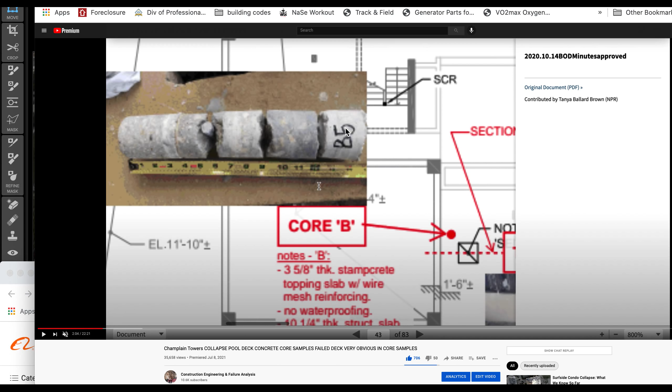Look at this video down here I have called Champlain Towers Collapse, Pool Deck Concrete Core Samples Failed. Deck very obvious in core samples. All right, here are your samples. This is B5, as we go to 8.

Tom, I wanted to give a shout out to you on something here. Let me jump right into the repairs. Look at my notes here also. I got a few pages to hit on.

So let's look at this deck repair. This says pool slab full depth repair. So that deck had some major issues with it. I talked about that in the video, and I don't know if that video or another one, but this shows it was failing in the middle.

Now, I think what happened was, using all the witness statements now, specifically the Nayers, the 111 people - when she heard collapse, when she heard the floor fall down or wall fall down above, and the daughter said the same thing, I think what happened was part of the deck in the garage had an initial drop, and then a stop. And that stage that stopped went all the way over to the building and shook their building.

Now she goes - at that point she doesn't look out the window, she doesn't look out the door, right? She goes to the office. She walks down the hall to complain about noise. And then she hears a loud bang from the garage.

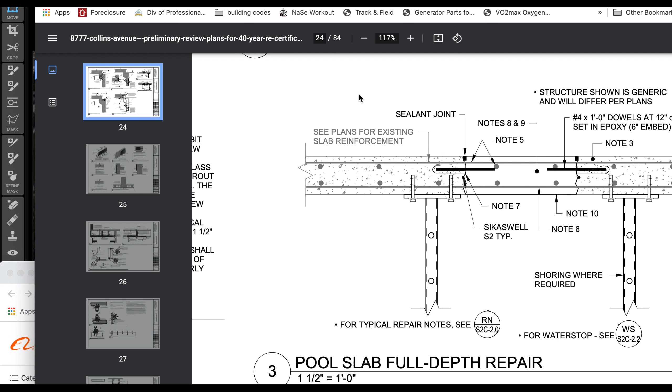Let me do that visually now. So 24 - I should go to page 11. Well, before I do that, I want to show you these are full deck repairs. I want to show you something else that's kind of a ridiculous statement on here. Let me back up - not on my part. I make a lot of those, but not right now.

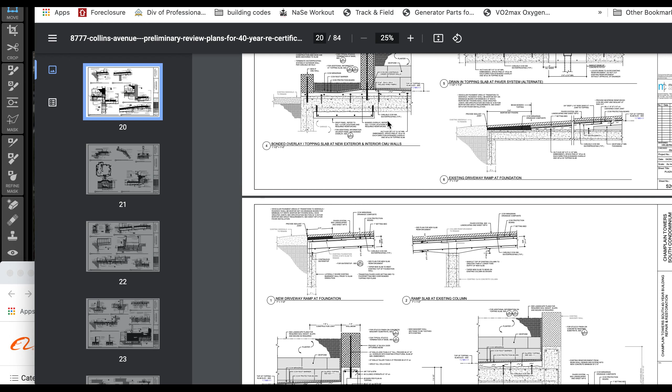So I come up a little bit. Look at my notes here. I think at page 11, but I think there's something up here real close, or it might have been down below. Let me just push on through this to page 11. Then we'll come back to page 2, 3. Yeah, let's push on through this. Trust me on it, and bear with me.

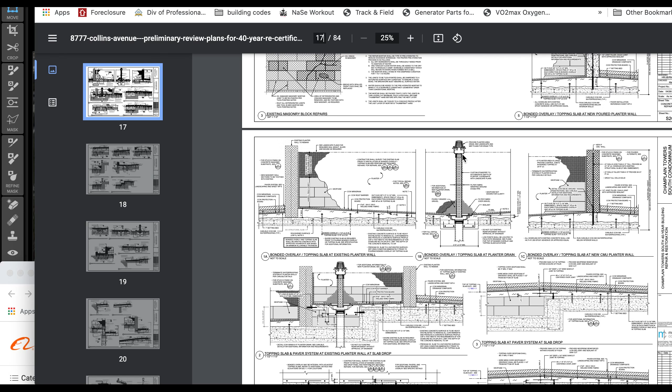So that's a slab drop right there. See, topping slab pavers at storefront at slab drop right there. And slab drop again. And your BMAs - of course we know them, they're beam style A, right? But BMA is the quick way to get to it. Just say BMA, just do the abbreviation. You don't have to say beam A, just BMA. For the triggered people out there, you'll get over it.

All right, so I'm on page 15 now. I want you to think about punching shear protection, about critical shear zones. Well, this is a BMA right here. This is the beam A. This is the BMA right here. And look what they're doing here at a BMA.

This says gravity fed epoxy full-thickness crack. A full-thickness crack - you know what that means? That means this concrete has pulled away in the rebar engagement, as we talk about it in a very light manner. We have some pull-out going on here. To get pull-out, we have to have deflection. We have to have loss of stiffity - stiffity to get pull-out, you got loss of stiffity. Yes, I said stiffity. All right, so this will be the deck.

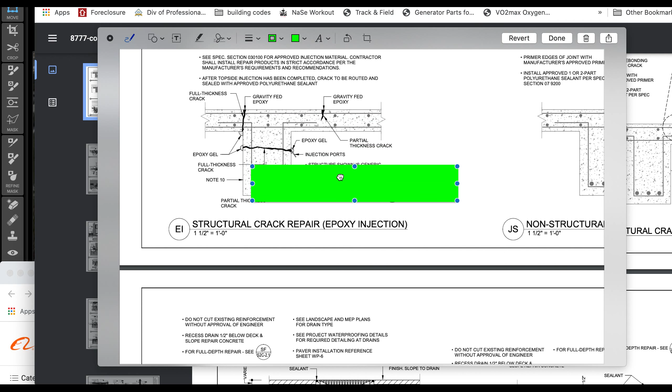And so here's our non-breaking part on this side of this BMA. So let's do that. And on this side, let's do this. I'm going to do a couple of them. I think I'll do that one like that. Okay, so that's the concrete, this capacity.

Now watch what happens when I put... really, you're acting together now? Oh, right. Because I turned it, I made a square. It thinks I wanted to make a square.

All right, so here's our beam. Here's our concrete. Right in here is that crack. I'll give you a little piece of concrete right there. All right, we can push that up. So thanks, Bruce. So there's the crack. How do we get that apart from each other?

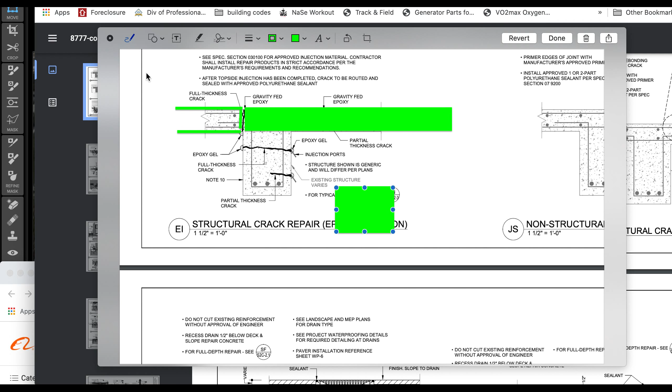Well, what happened was they decided to stretch. It stretched apart, right? So this stretches apart. What happens? This beam, this BMA, has to push somewhere. It has to go with it, right? So bear with me being facetious, guys, I hope you understand.

Wait a minute, that could just shear across the top of this BMA. So they got to move together. Oh, wait a minute. Not for free, there's a wall here. Not for free. So, whoops, it runs into the wall and knocks the wall over.

It doesn't present that way. But what it presents as this. Let's go back to that crack. Let's move this out of the way. So here we have, let's look at it in the capacity.

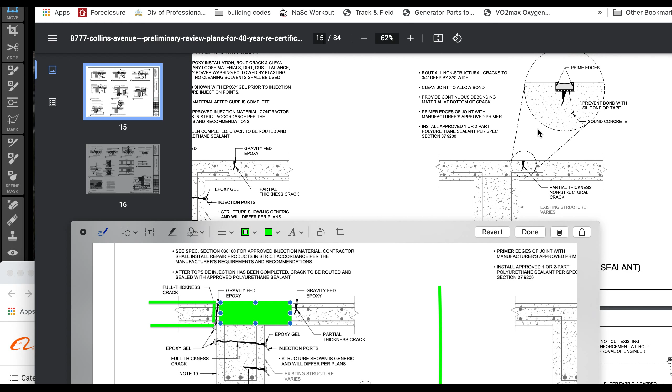This is amazing, the title of this one called, this is a non-structural crack over here, titled over here. This says partial thickness non-structural crack. It looks friggin' huge.

To get that, you would do the same thing to get this one. To get this full crack, you're looking at a hinged deck. You're looking at deflection in a deck like this. This deck deflected, and I'm exaggerating to get you there, but this gets you there. I want to grab this little guy. This is my exaggeration crack.

All right, that's opening. That's going to be higher, thicker here, tighter here because this is compressive down here. It's going to want to hit that, but that's the exaggeration version of it.

All right, so. This is at what? A critical shear area, isn't it? Because it's right above. This is connected at a column, and that one's connected at a column. They just ran a deck and then put this like upside down strong back in there. This is connected at a column.

And this crack represents deflection in the deck. The deck over on this side. Oh, wait a minute, we got a crack over here. That crack represents deflection in the deck over here, like this. And when it falls down, this stays here, thereupon connected to the column here, and we get this opening. There's a compressive moment in here, but it took it to the point where it didn't fracture all the way through, and it went that far.

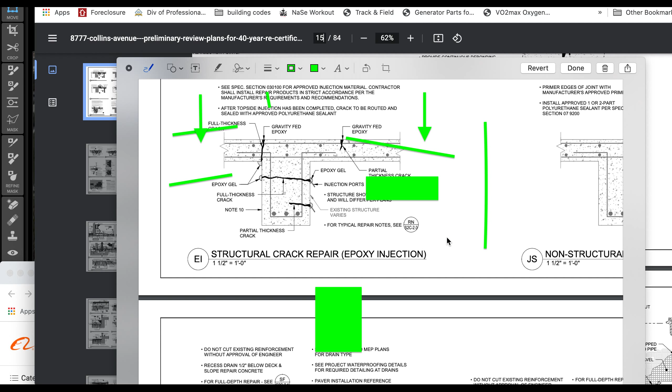Now, there's a load between the two. This is carrying a load. This BMA rather, it's going across, right? Remember the BMAs look like something like this, right? So there's a BMA. This one here would be this one.

Well, if we could look at it sideways like this, and let's put a column going down. Let's do that. And there's a column over here also. We would look at it at the end of it. We would see this fracture. And this fracture is somewhere in there representing that this deflection, that this is deflecting, again creating the tension in the steel, tension in the concrete, and it's reacting right there, showing a full crack.

He's showing both sides. That's fully developed all the way through with this type of detail here. I don't know how long it is, but it's showing. And look, here's a secondary one down here where it wants to come apart. Now this is going to add up. It's going to add up real fast for you if I get to page 13, if this is the right 13 document.

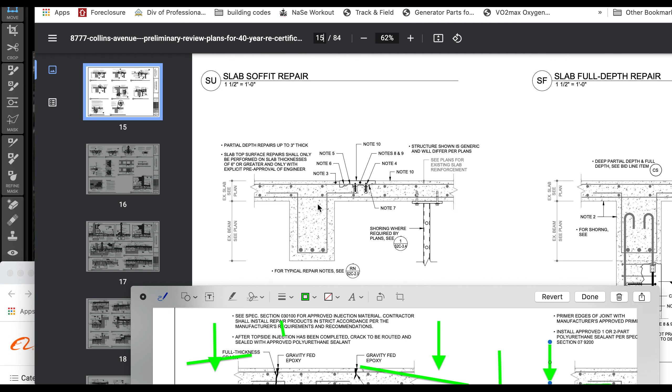So there it is again. This is around your, right around, this one's kind of shallow near the top, but nevertheless it's still a cantilever past there. It's again by your BMAs. Your BMAs, right? It's by your BMAs. So your BMAs. Now, here's a problem I'm having. It actually says it's by.

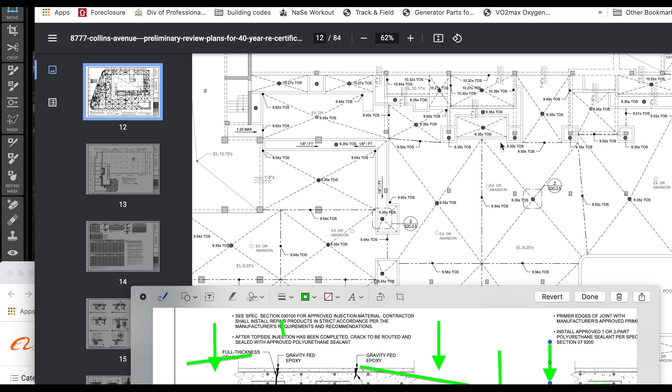We go to page 11. Let's move on, I'm still working on that. So now we come over here, page 12. Here is our KLM. Here's M, a K, L, and M. Right about here, we're going to see on the next reveal coming up, page 11. Better be just page 11.

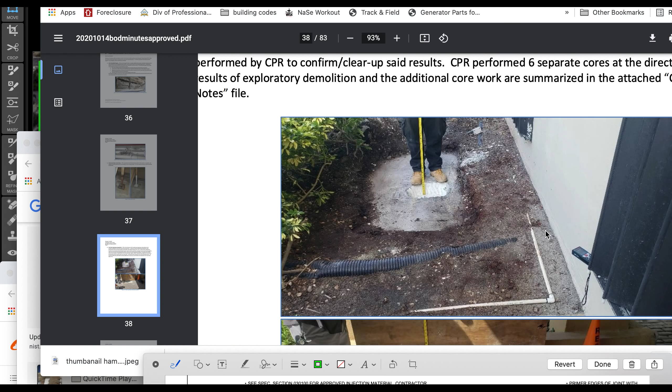Previous video, but lo and behold, we're right here by the stamped concrete. Where's the stamped concrete? In the garage area, in the driveway area, sampling there. Now he's doing his own test, working by himself. He did this, and over here is like a Bosch laser. I know I've got, I think I have the similar laser, one of them also.

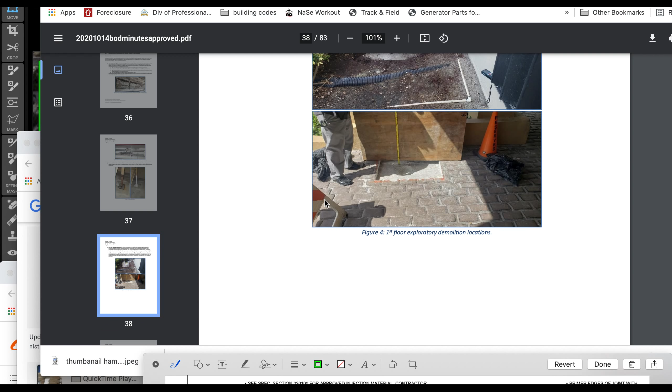So that's why he probably has the board up, so he can spot the dot and do his elevations. He's figured out his elevations, but this appears to be by that planter. There's your bollard, right in front of the planter by the driveway, and he just blocked it off.

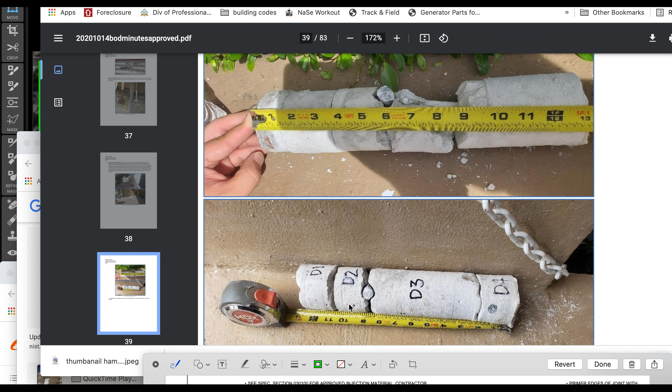You look at this and you call it broken. When you start testing samples, as soon as it fractures, whether it comes off the top a little bit or cracks all the way down, the sample is done. It's considered failed at that point. So if you were to start compressing this and you get a slight fracture right here, it's done. If it happened at 1,200 pounds, it's done. Even though you may think you have all the material left, it's already failed.

This has failed multiple times. One, two, three. This presents as steel right here, so there's a layer of steel there. That would put it at what? That's 1 inch, that's 9 inches, about 8 inches apart. And so it puts it high and low again, as we know. About 8 inches apart.

And then we have this, D1, D2, D3, D4. The way he broke it up, he had to number them. She or he had to number them to remember how they came out of the damn hole.

It's multiple layers. It's like each one's a sheet of paper, one piece of plywood. Imagine if you took the layers apart and you stepped on it, they would just bypass each other. One, two, three, four, and that might even be five.

So that's what I'm showing you there, is that all these engineers saying they did calculations on the deck are just full of shit. They're full of shit. They did no calculations on this deck. None. This is what the deck presents as. It presents as a failed piece of material decking, done.

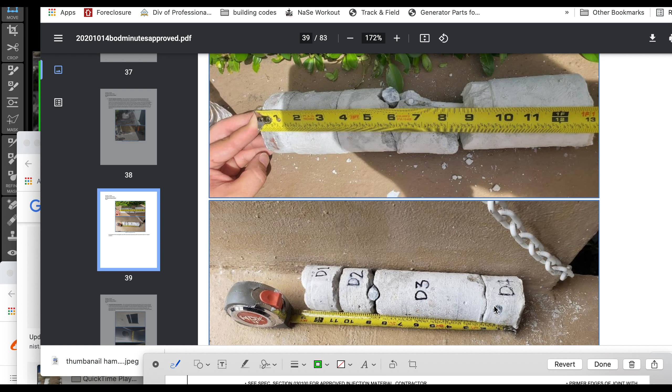Now let me find that damn 13 for you. Core sample A, Mr. A, comes right down by column M. Mr. A is column M, right in front of the planter box, which is right in front of there. This is our shit deck.

The core sample came out of there. We're looking at the planter box area, the tiles, pavers, whatever you guys want to call them, whatever you're triggered by.

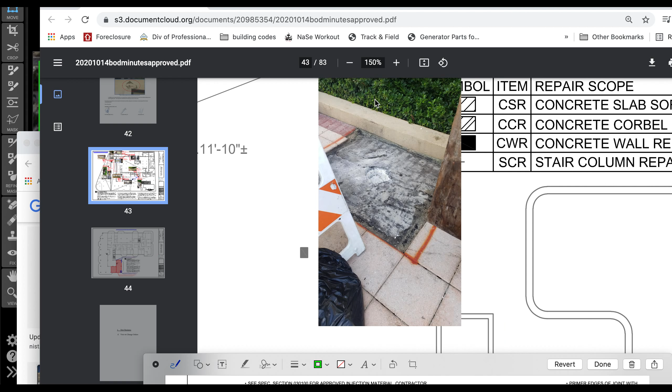Listen, everybody that's triggered, I'm tired of you guys also. You don't understand, do not contact me, what that means. I see you signing back in and doing your childish comments, and you just made a new account literally today. A couple of you did, or one of you did, or you're doing the same thing over and over.

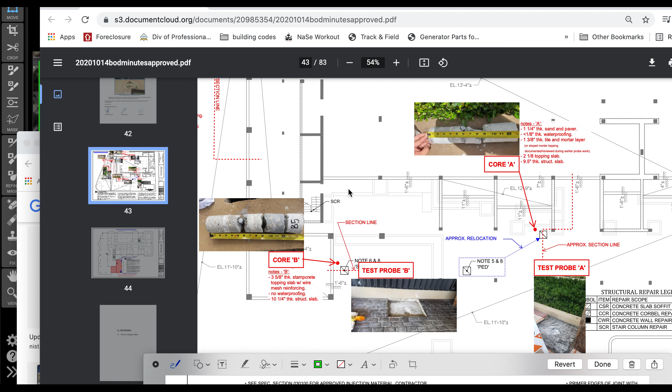Really, go away. Go play with the other people, go play with the children. Go away from me. You can bet I've already reported you as a false account and harassment. Now you're a new account, and of course they'll be able to tie you back to your old account. You're an asshole, go away. Stop coming back here, I don't have anything for you. Go watch the Tool Jack Off guy, Jeff Off, whatever his name is.

And what's his name? But look, that's too far back. Let's come here, here's the parking garage. The parking garage where we have the shear plane failure, right about here, shows that deck was shit. There's a dissection of it before the collapse. We're looking at it. It's shit.

There is no calculation that Josh can run. There's no calculation that any of those other engineers you guys send me links to can run. If they run it, you're being lied to, deceived. It's broken up. There is no calculation for this. Anybody who does testing will tell you this is a failed sample. Whatever it came out at is whatever it came out as.

Now they can take each one of these pieces and fracture each one individually, but as soon as it moves a little piece off of it, it's done. The sample's done, it's considered failed. It would be interesting to do that, to see how each one would behave. That would be very, very interesting.

Incidentally, there's a report attached to this about these. I can't find a report. Tom and I tried to play around with it. I called Tom up and we talked and said, Tom, can you find a report? He couldn't find it either. We couldn't find a report on what they finally said about this. And maybe we're looking at it right now. Maybe this is the extent of it.

But you're looking at right here, RM. Test probe, approximate section line. 1 foot 6 elevation. What we got going on here? So they took a piece of steel out. Note 5 & 8, approximate relocation.

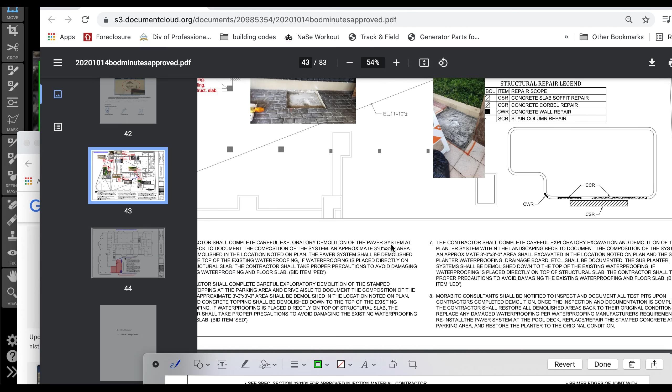They asked for extra samples. That's a soffit, so the soffit is not really—that's a soffit area, so that's not really my concern, but let's back up again. We got it through M, baby.

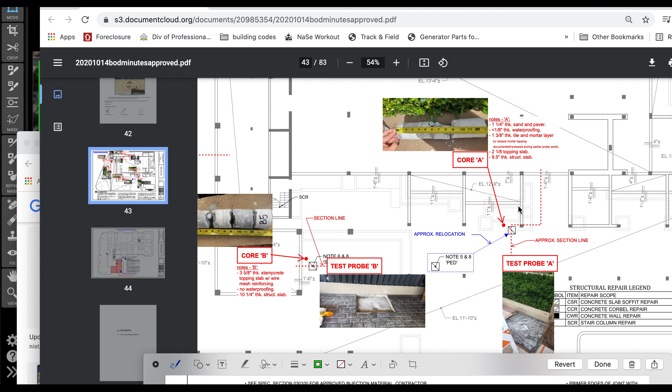This is all I wanted to get you guys, is I got us to M. I got us to M. I have us on these BMHs. BMAs are in a failed capacity, that they need—some of them are failing, fractured. They need full support. So let's get you that full support thing before I go off.

Go on, let me look to the left. I don't know if this is the document. I think this might be it. Let me just scroll real fast to the left. Sorry guys, I'm crossing my legs. Let me scroll to the left real quick.

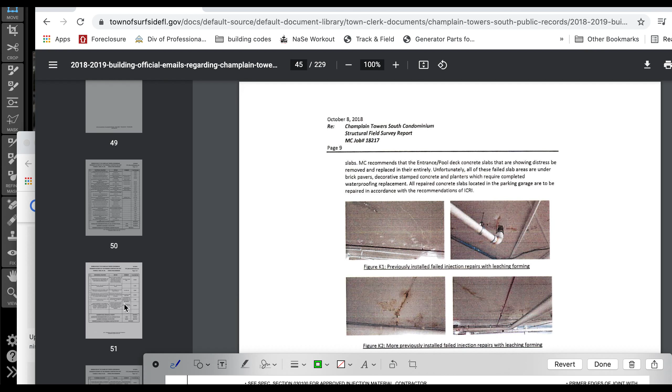I'm not worried about minor things like this, or that little bit of cracking. Water coming through shows you that it's deflected again. The epoxy would have closed it up. If water's still coming through, either he didn't fully epoxy it, or it deflected again and the epoxy failed. Well, the epoxy didn't fail, the installer—the marriage failed. How's that?

Come on, baby. Right, that's the pool stuff. The thumbnail's to the left, that's just pool stuff.

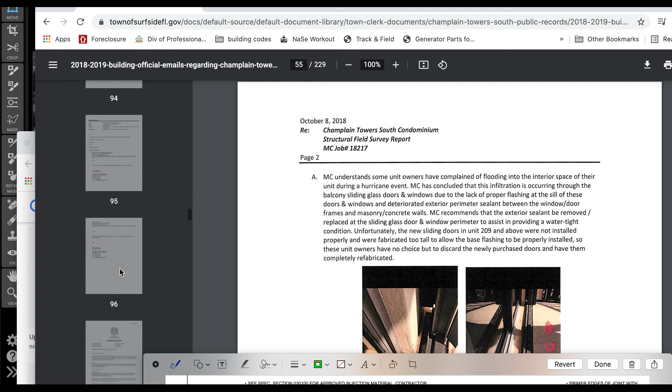Okay, so I pull this down. We'll be able to pull this one back up.

So right here is where the repairs are supposed to be, all of them coming out to this S2C-2.3. The repairs, they basically tear off the deck and go from there. Have you all of this junk, everything there, all of it, just off—just OFF, right? So that's page 11.

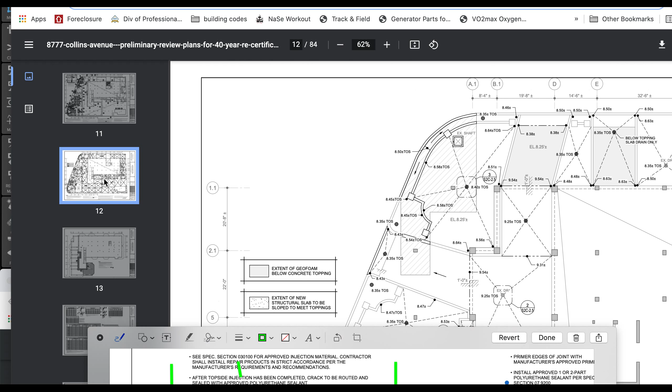What did I have here? I said page 15 for some reason. I think we did 15 already. Let's see, 15 says puncturing, right? Oh yeah, so here's this deck failing where it comes up to that BMA. So it comes up to that BMA, which we know to be page 35, right? So it comes up to there, and I'm guessing it is.

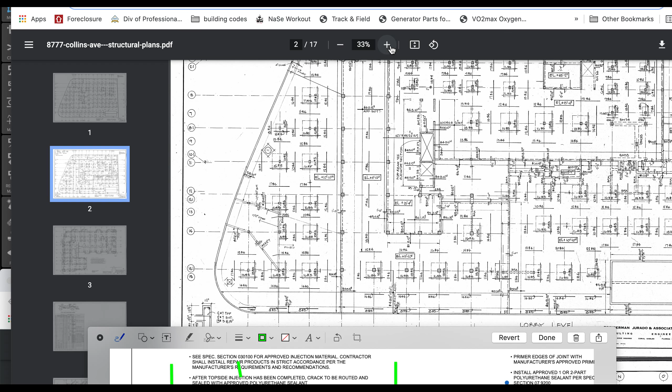Come on, page. So I'm going to zoom in a little bit. Zoom in again, I'm going to shift this over.

So this is what I think is the fractured one, this one, or it could be this long one here, or this long one here, or this one. Now I'm going to show you support of two of these parallel to each other. So it's either supporting this one and repairing this one, I think was going on.

So support this one and this one. Why would they repair this one? It's an odd duck on repairs. And that would look like, we go back to our repairs. There's a lot of puncturing issues going on, right here going up to a BMA. So that's going up to a BMA.

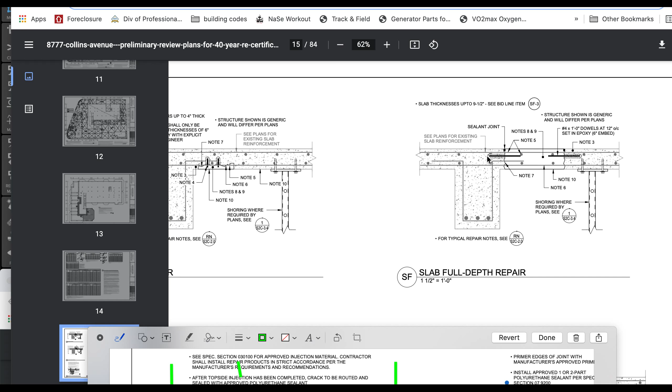You support the floor before it. And then you take out this section, not cut out, you break it apart, jackhammer it, whatever, you follow the notes. You put more reinforcement at the top, you close it up. That helps get this deck tied into this BMA, transferring the loads down the columns.

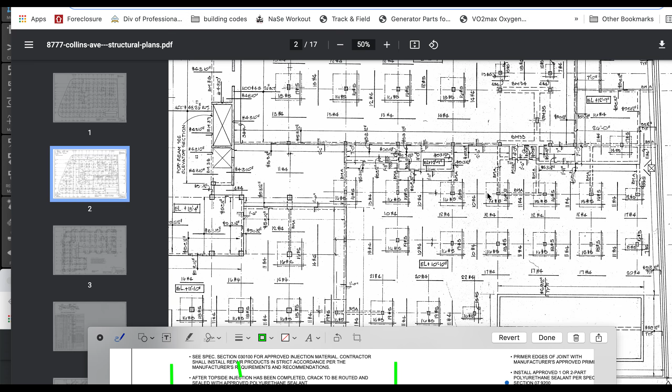I want to do this release differently, but this is multiple decks. See, this goes up to here, and then this is another deck up here, 12'9", and there's reinforcement inside there, so it's not solid filled concrete, at least not per the drawings. It's another mini deck that goes up, and then you have a 7-inch step into the property.

So it's a deck over to this BMA, beam A for you sensitive folks, and then this BMA as it stays there, and then it goes up an additional 1 foot 11 inches, and I think that would have been changed to probably 1 foot because of the elevation change by 1 foot here. So they would deduct 1 foot from here. So again, we lose our BMA sizing to help support this decking, but it's pretty close there.

But nevertheless, it's the end. It's where the deck connects there. It connects here, then goes to the porch here, which is at 12'9". All the way over to here is 12'9". This is another deck, 7 foot out, but at the same elevation.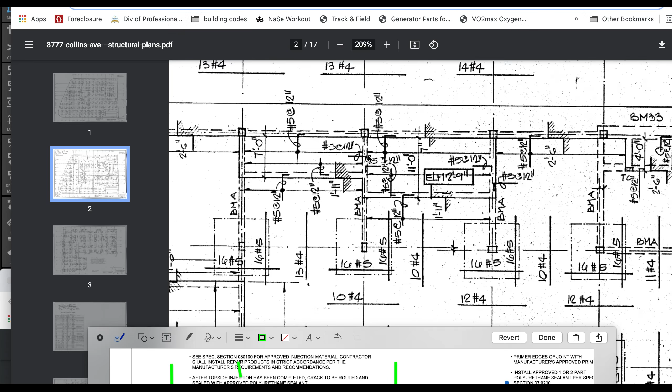You can see the rebar, why I call it another deck, because the reinforcement is hook shaped. It stops, it doesn't cross over. They wanted it to come to the BMA and be installed on top of it as such. Now, can I get us to the BMA image-wise?

Oh, this is the clown I'm talking about. They came back, just signed up today, came back and started harassing me. You know what? I'm going to see you every time, and you're getting blocked. You people are so obvious. That's the clown, he's already been blocked, so he gets the clown block. He's not even worth the PayPal, he's somebody who harasses you. So he can just bite dick, go away. You know.

So what do we have here? So this is the many pages, right? Let me scroll back up here again and get us back to that beautiful point in this one. Looking to the pages to the left. And look at my notes now.

So top of slab, right? Test, right, so you saw it was in front of them. Yeah, where is it? So you saw it was in front of our M, our defects. So we're at M now. We're at M with a deck that's willing to separate and shear and everything.

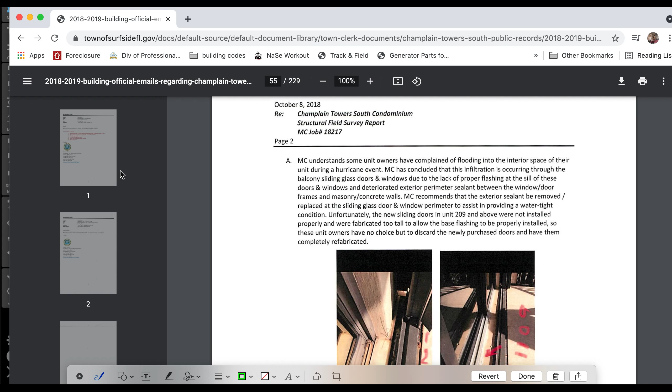Now, that's what it was. I want to play the mama bear again. I want to play her content again. Really? Really?

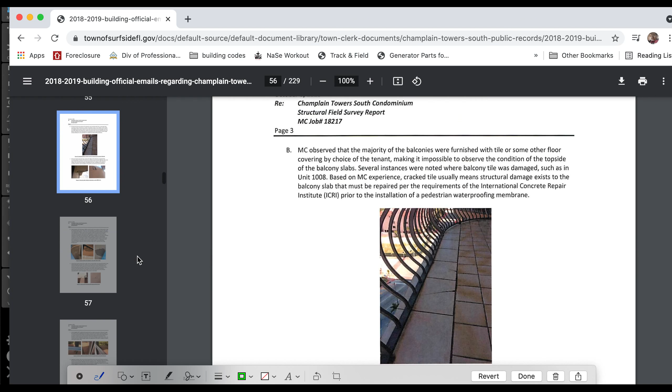I'm trying to find that same page again. Let's do this, here it is. This is what I'm looking for. So I think now that we have possibly this area right here, let's do this. Let me give you a profile of it when I do it.

So I think we have the deck initially getting some puncture down and over a slight bit, maybe even over to there. Oops. So from here, right? So it would be all this area.

Delete, let's do it again. So let's do this and let's turn. Let's go towards the pool. Let's turn and let's go at the expansion joint. Look at that, amazing, where the dots are lining up with the expansion joint.

Isn't that friggin' amazing? So I think that their initial bump was this dropping down, so a slight drop. Maybe 2 inches, let's call it 2 inches, right? Nothing for free, nothing for free. That's 2 inches.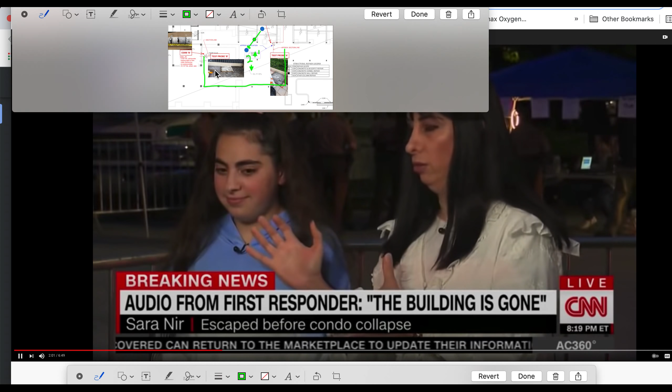And I was running to see where the sound comes from. And I saw all the garage collapse. So remember, the security guard said it was the elevator. But clearly she was participating also.

And she had no problem going beyond the elevators and looking into the lobby area out this window here and noticed the cars collapsed. She says all the cars collapsed, right?

I couldn't believe it. I thought I'm in a movie. I look again and I ran back to the hallway and I saw my two kids. See, they were at the hallway at that point.

But remember, he tells a story that he's the hero, but we'll move on. We'll just accept her story, and quite frankly, we don't really need his story anymore. He's adjusted his story since the Twitter one, but we don't need it.

It's nice, but her story is more solid because I don't like how, I know that you guys can, we know about stress and everything else, but at one point you now made yourself the hero in that. How come you didn't make yourself as my mom? You didn't remember your mom saying in the hallway and come out?

She's not disputing it. I look again and I ran back to the hallway. And I saw my two kids standing next to the door. Remember? And he's like, he tells the story.

I told him we got to get out of here. And really? So apparently his amygdala won't allow him to play second fiddle to this incident.

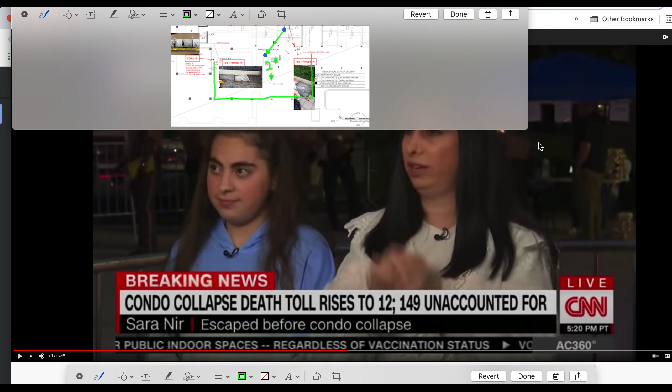We just crossed Collins. God watch us. God was waiting for us to leave. So, yeah, when it collapsed, it didn't just cross Collins - it's a little bit different. She's compressing time at that point.

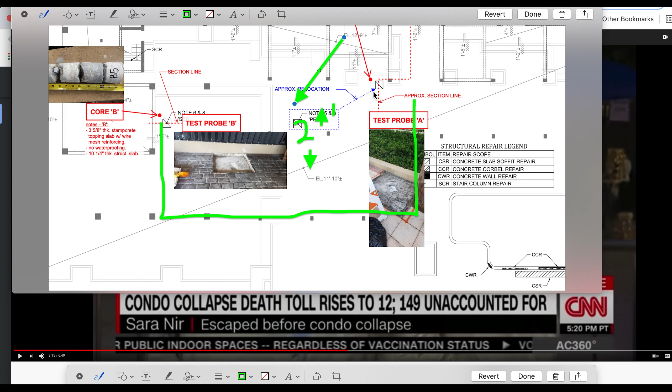We have structural integrity problems that we can clearly see from these samples. We can get there from here. So let me move this out of the way. So we've got these BMAs - we have the sample, we have the deteriorated materials. These BMA type are all shot.

Now let me get you the supports of the beam. Let me come over here to the left, it might be faster. I might have to go back. I'm looking for the supports right here. So this is the supports of those sisters, those two BMAs.

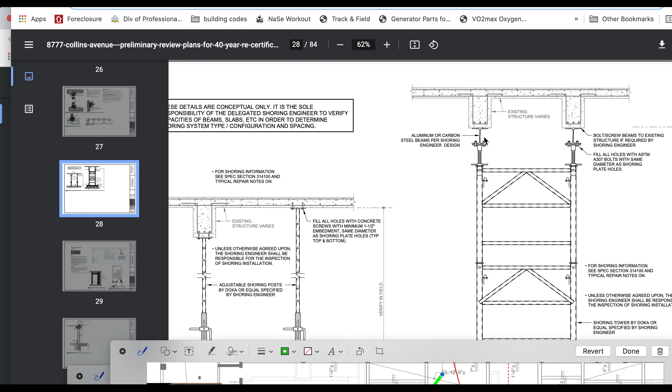Now I can try to extrapolate, but the scaffolding that was just done could be stretched in software and things like that. These two little ladies are side by side - this is single, this is where repair was going to go, and that's also a critical shear area we're talking about. So there's plenty of failures that were already identified for this deck to collapse.

Plenty of failures, IMO - in my opinion, pretty obvious. So what I want to show you, going back to this.

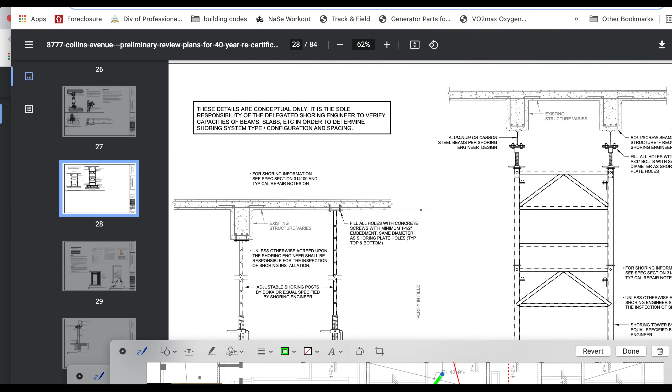So we have two of them together, those supports - are they this one and this one? And then they're going to fix this BMA here, and it would also have to be supported while they're fixing it. So is this it? And then support the deck that leads up to it. So we're looking at the three of them together.

Well, they present as the same height, but the engineer leaves the location - he's not specific on this location, but we only know of these type BMAs over there.

All right, so now we have multiple decks. Remember this again - this is the pool deck and the garage deck, they're the same level. All right, so that's the same level. This is not of the same level. This steps up to 12'9", which would still step up to 12'9", but you would lose only an 11-inch step up. That puts us in this, again, multiple decks here and here.

This is where our other flower pots, this is important because this is where we have the flower pots that present as level. So that shows you that's a separate deck area that when it went down, here's our shear plane, right? And this is where all the materials came and collapsed in here. But here's our shear plane created, and that went down together on its own little separate deck, elevated at 12'9" - 1 foot greater than this deck.

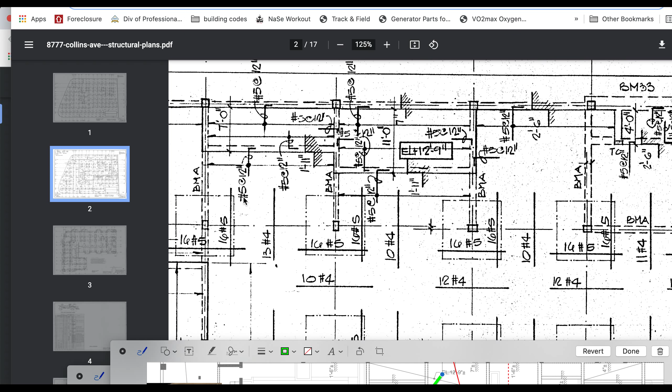Now over here again, we have the samples - this shows defective. Let's do that, and let's wrap up the video with this, because it took me a long time to get you guys here, but hopefully you'll understand.

So don't follow any of those engineers that tell you they ran calculations. What's, I mean, a couple of you are in the medical field - if I bring you a broken bone, a fractured leg, how much weight can I lift on that fractured leg?

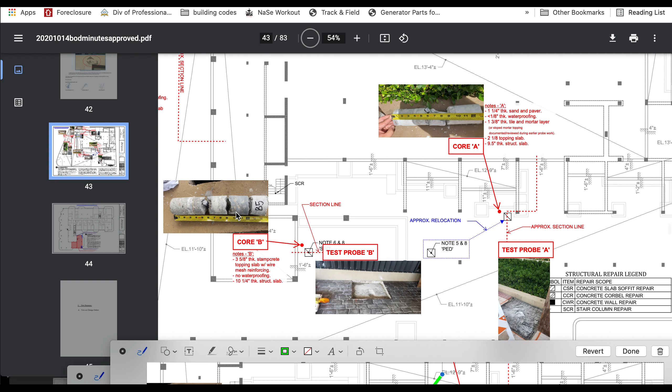Just tell me, how much can you calculate I can lift? You'd tell me, well, nothing until it heals. You should be limping on it, so I wouldn't give you any load ability. I'd say you're going to limp, and possibly get gangrene if you don't get it fixed. You're going to set it, and it's going to take 6 weeks to heal, and then we'll revisit how much muscle atrophy you have.

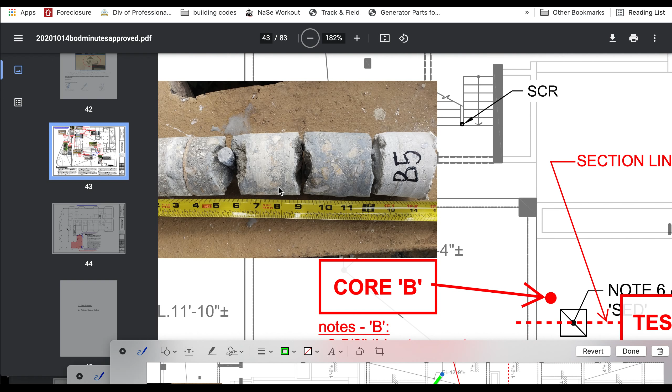The material is broken up. It's been shearing, running across each other for a long time. Looks like it might have been a piece of steel, but it's been rubbing against each other, moving up and down. This location is right here by the car garage. It's been cycling its ass off, cycling disgustingly so. There's what it looks like.

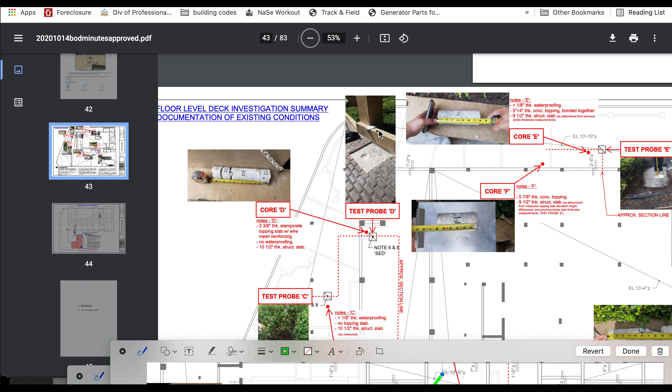There's a core sample, how beautiful it is internally. I love to see that. C, up here, that's up there. So that's interesting.

Where's the core sample? Oh, there's a core sample there. Oh shit, yes, the whole deck is just shit. This is coming into the driveway area there. Look at that, look at that one.

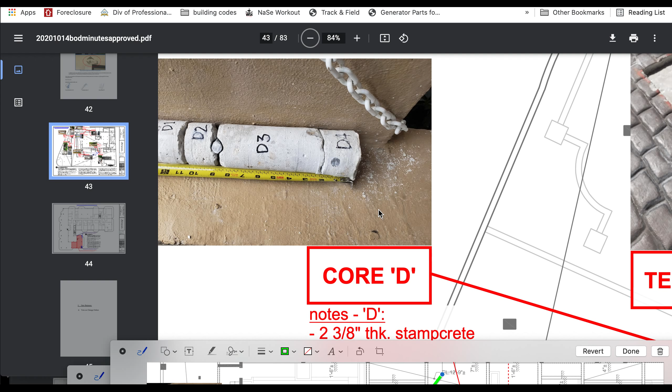Okay, let's see how they present, how they fail in similarities. So we've got a 2-inch break, and then let's call it 8.5, and then 10.5. 2, 8.5, and then 10.5. 2, 8, and then 10.5. Really? I'm trying to zoom out.

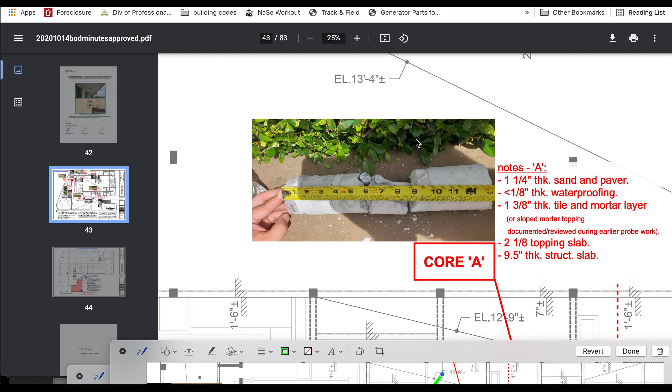So then let's look at this one. Nope, let's zoom back out. Really? I'm waiting for it to catch up. 2, 8.5, and 10.5, really? I'm waiting for it to catch up. I really need to step my game up on this computer programming stuff, don't I?

So this one is here. That one's there, nowhere near it. Oh, that's a pun on words, isn't it? So that one's dissected itself.

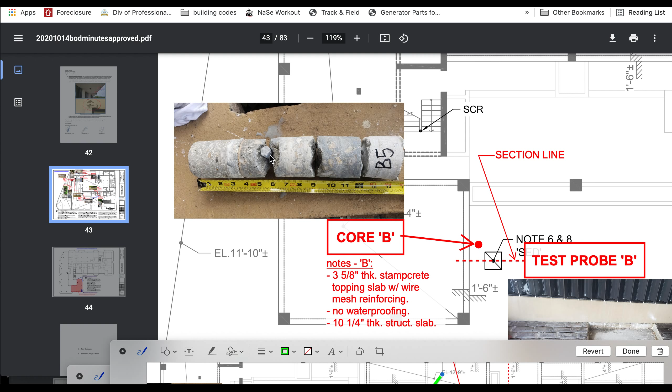What did I talk to you guys about? What did I tell you about steel? You show me the steel, I'll show you a control joint. I tell you that steel acts as a control joint. I've stated this numerous times, pissed off a lot of engineers on it. The steel is not just reinforcement, but it's also a control joint where a fracture is created. There's the steel, there's the fracture.

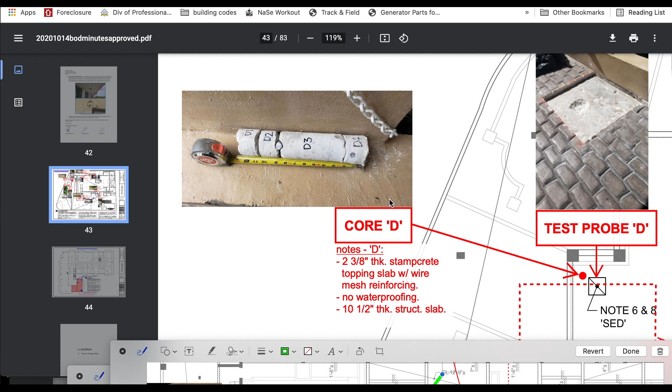There's the steel, there's the fracture. This one's right above that steel there. One thing I love, some crack. I love me some crack. All right, there's the steel, there's the fracture.

Love cracks. All right, so test probe A over yonder, way over there by the... oh no, this is just a line running through it. It is right here, it's right here. Approximate section line.

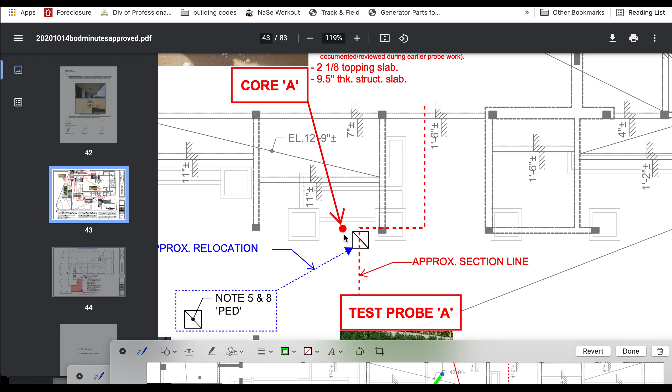Okay, so again, very interesting that they took out, okay, there's 11 inches. Remember I said it was 1 foot 11, and then we take off the 1 inch elevation, and there's your 11 inches because the deck came up 1 foot. So there it is, Core A, right about there, and we got all these fractured materials.

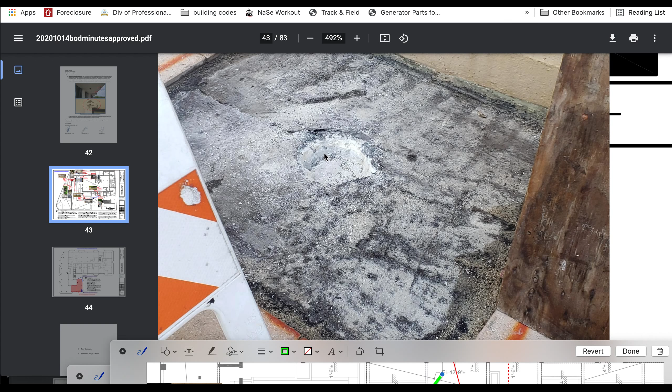Is that the waterproofing for underneath the tile for whatever it is? But that's one ugly hole. If that was the hole, I've seen this ugly hole before over there. I saw a clean hole. Why do we get these shitty holes here? I mean, I'm thinking they're getting below the bedding material, but that bedding material looks like that's about it right there. So what is this crap?

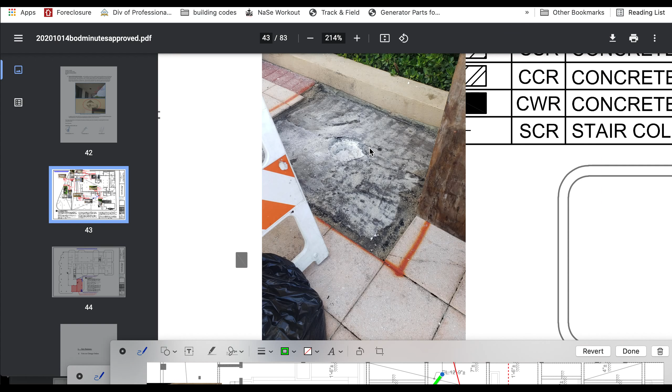You know, what is this? What is this? I saw it, I saw it over here too. It drives me crazy, let me show it to you. That shitty hole. I did it here also. This is over by the right there, that shear plane issue, right where the car would park.

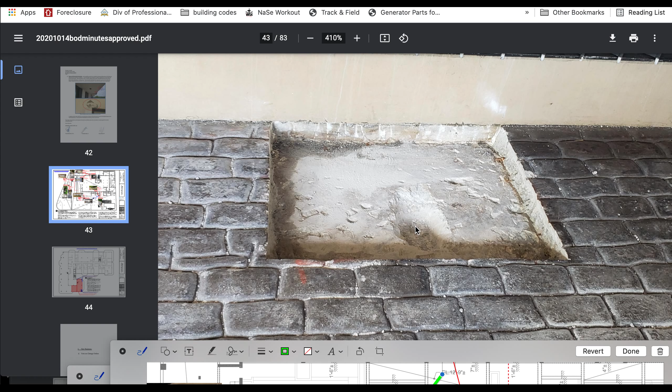With wire mesh reinforcement, no waterproofing, a 10 1/4 inch thick structural slab. How can you even call that a structural slab? You would just say, you know, 10 and...

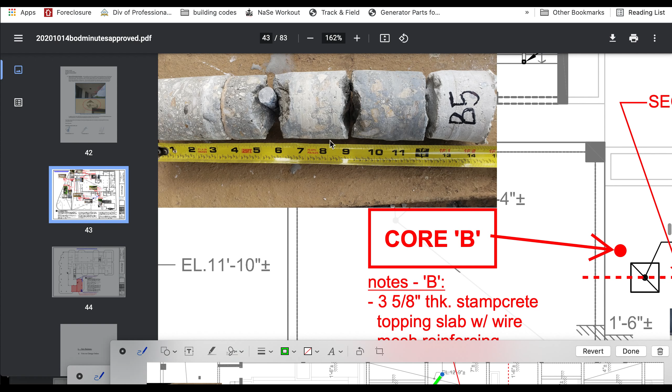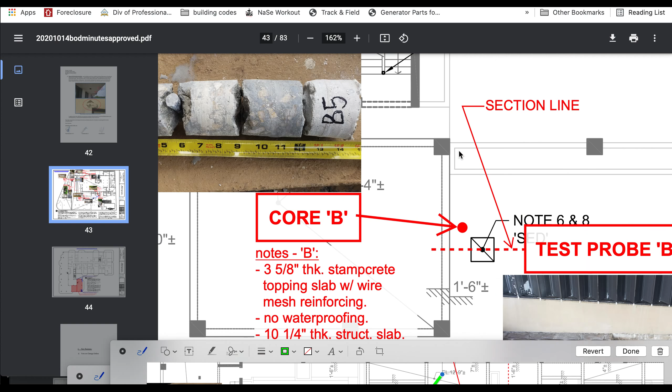I find this, guys, look. Would you walk across something like that? Let me ask you that. So I got to be fair, I'll use you as the public. Would you walk, if you could see this all broken up like this, would you walk across that? And there was a drop below. Would you walk across it? Now, would you drive your car across that had you seen that?

Now, why is this being used as a parking area if it looks like this? Why wasn't it load restricted? I don't get why it wasn't load restricted. I think there's some money to be made there. You know what I'm trying to hint at? You guys finish off the rest of my words, because I can't be caught with the wrong wording.

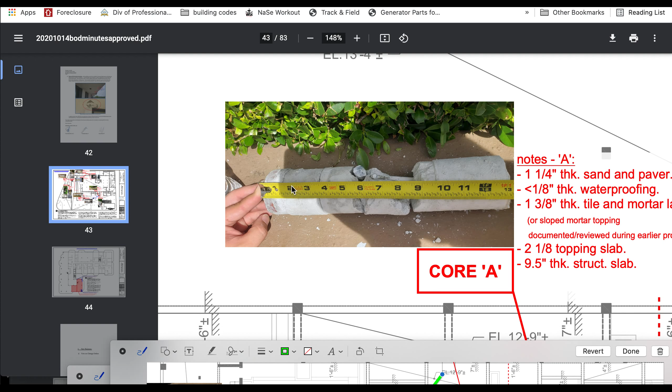But you figure out what I mean. And this deck here, you know, the car restrictions, that's our breakaway. Now I'm going to show you in future videos how these interact together. I'm going to get 1, 2, 3, 4 layers, and show you what happens when I push down on the top layer. So grab 4 pieces of paper, for example, lay them there, push down, and look at the outside edges of that paper and see how they react, because each one of these, as they're loading, are going to start acting differently. That's at the car area.

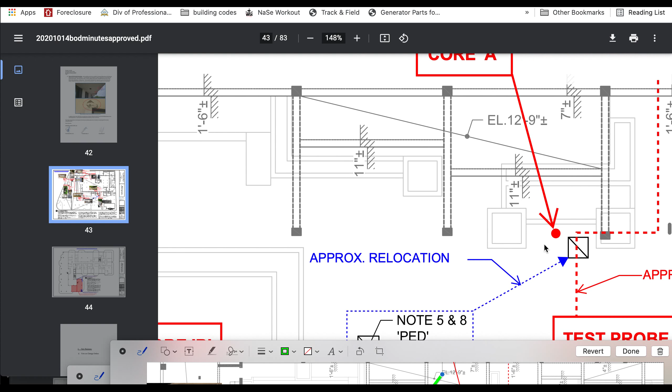In the deck area, there's the 40-pound live load, you're walking on it. I'm not going to count that as creating any more issues, but it's already an issue. This is fractured way over to here, all fractured up right at the critical shear area, right? It's right about there. There's a critical shear area transferring over here and here. This is where it transfers over to the critical shear area right here.

That rebar is right about upon the critical shear area. The 16 number 5s coming there, and then going down there the 10 number 4s, which is awesome because we know it's 10 number 4s, and this says it's 12 number 4s. These are 1/2 inch steel, and this is 5/8 inch steel.

We would be able to use a tape measure on this to see which steel it is. Oops, wrong one. We would be able to see which steel it really is, and we'll be able to tell you which section it is. I'm going to guess that's the 5/8 steel.

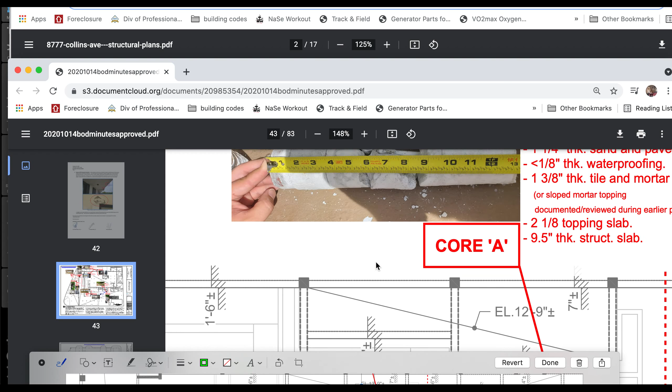Ah, not that far, it's too far out. That's damn near 1/3 out. So 1/3 out, I'm going to go with. I'm looking at it, 1/3 right about there. 1/3, I'm going to say. You know what?

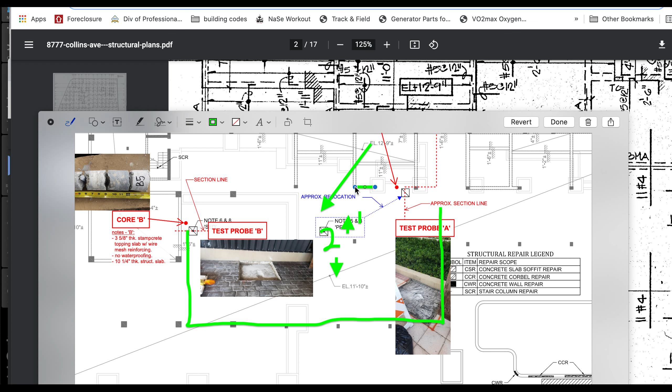I think 1/3 is a great choice. See right here, in line with this one? Then I'll move it over. I'll put it back there at 1/3. So that's about 1/3. Grab it. Dot. I'd say it's about 1/3. So with this one, let's do the 1/3 here. Let's have it at the 1/3 location. I'll just pop up one, and let's just do the 1/3. Let's go.

Say right about there. That's that dot, 2, that puts me right about there. A little much, so I'll split the difference a little bit. 1, 2, it's just before the dot. Not enough. Okay, just before the dot, 2, 3, 1/3. So that's 1/3, and that puts it out of the critical shear zone.

There's a critical shear zone right here with this extra steel. So this puts us in the... now that might go all the way across. It might be the 16 number 5s, might go all the way across. Right here, these 16 number 5s and 10 number 4s here. So we would have a 90-degree steel inside that sample, if the steel crosses each other. So we should look at this sample and see a 90-degree metal, top to bottom.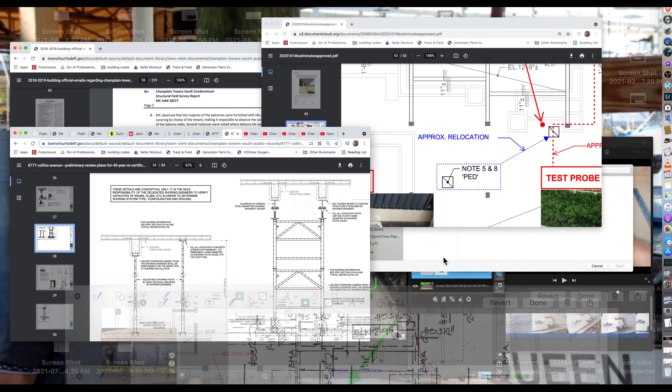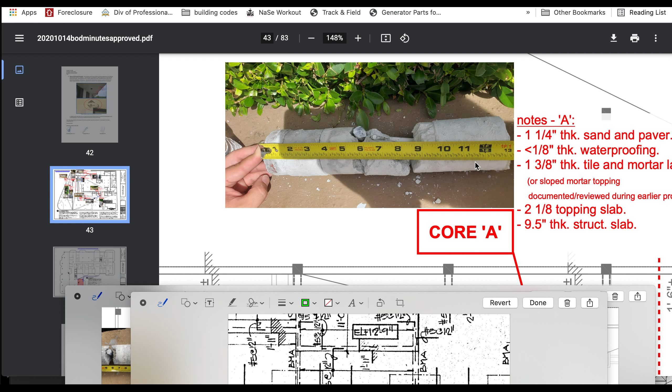So we go back to, where is it? Let's go back to the sample and see if we get a 90-degree rotation. Shit, I see there, so 90 would be down here. I can't see it. Hit the steel. Steel would have crossed it. Now I'll get a 90 on the other one, right? Don't I get a 90 on? Let me zoom out a little bit. Don't I get a 90 on the other one? Over here on maybe the parking garage. Kind of move over.

It looks like steel was in there, that little hole. I saw 2 pieces of steel in one of the samples. So let's go find it, let's hunt that extra piece of steel.

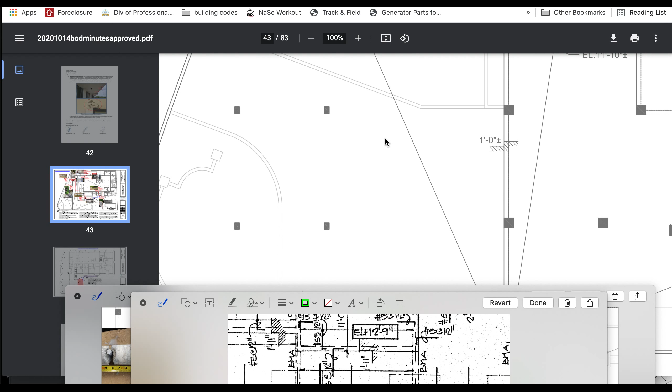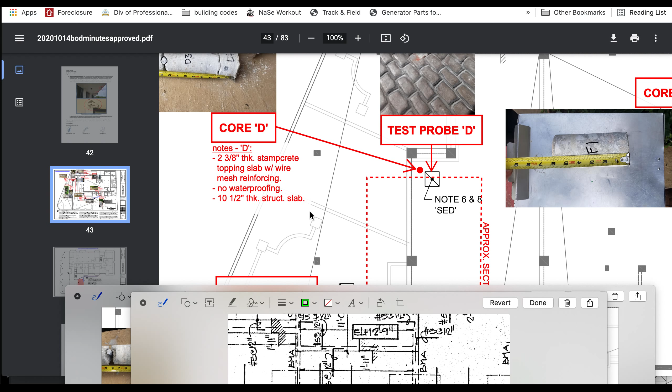That's what the core sample looks like, real nice, smooth holes. There's our steel. It's not quite 90, it looks more parallel than anything. Two layers going in the same direction, just a little bit of rotation on it.

Nothing to cry right home to mama about. That's nice and tight, so this steel, it's a lot of friction there. It broke apart. This steel is engaged, married, solid right there, but it took this part is what it engaged with.

This part took a grinding, like teeth. Ah, that's disgusting, but it's like teeth grinding apart. And that's interesting, a smooth section there. But it just ground apart. You can see how nice the steel looks there. You see the profile of the rib there. And this just ground apart.

It's just junk. That's a lot of deflection that took place. It deflected. This part's deflecting, rubbing, and knocking this part off. Down here, there's like teeth rubbing against each other. This is quite disgusting, an amazing find, of course.

Let's end the video with that. So now I got you there, I got you into the garage. Now I got to do models to get you in there, right? I got to do a bunch of models to get you inside.